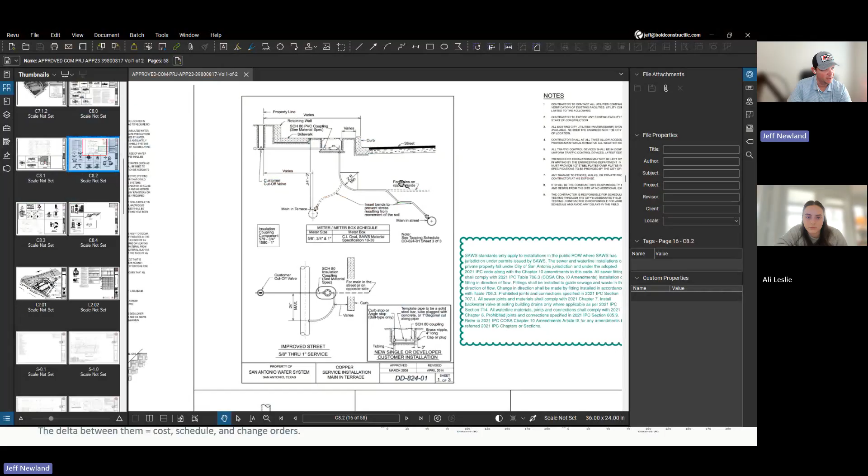And you can always tell that because it's usually on their own title block. This is called a title block. And the civil just pulls this from their website, in this case from the SAWS database for their drawings.

But you'll always have some type of detail that tells you, for instance, this is how we're going to set our manholes. And this is where the diameter of the lid, the inside diameter, kind of where it's piped, all that kind of good stuff. And you'll read these just like a normal set of plans.

So like where you would have a cut view or something like that on a set of architecturals, these will have, so this is 4.0, and this is actually his site paving plan is 4.0. So there, we've already busted the standard. Let me see, here's 4.1. What I'm looking for is the utility page. There we go. So here's our utilities, everything that was coming in.

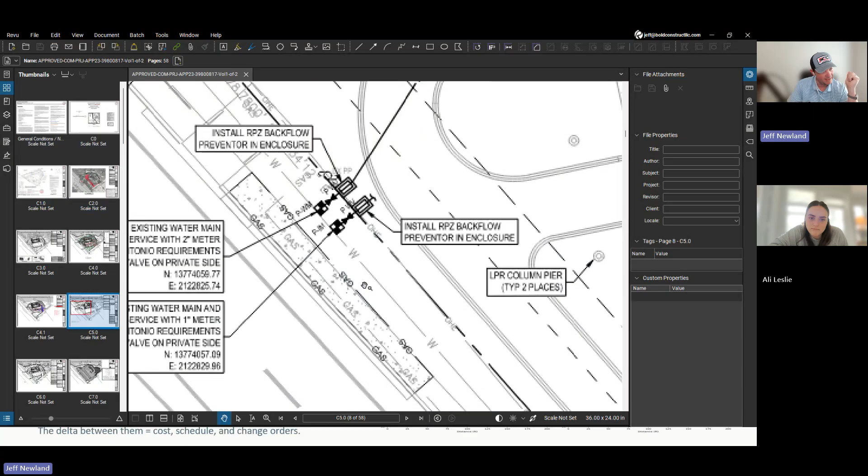So this information that I was talking about before that's not highlighted, it's not in dark black, came from the city. So they have water, gas, overhead electric, everything's running out here in this easement. And then that's where Hamilton tied on to it.

So that's where he elected to, he probably had a conversation with the city, and the city said, look, you can tie on as long as it's anywhere out here. It doesn't really matter. So then he ties on to it wherever he needs to in order for it to be convenient for us on site.

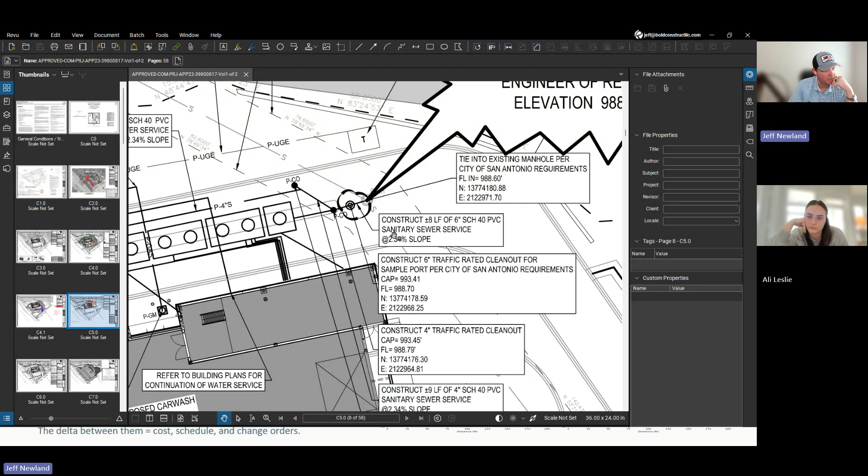But you can see here this shows a manhole that we're putting in. Also points to, let's see, construct plus or minus 8 linear feet of 6-inch Schedule 40 PVC pipe, sanitary sewer service, and it gives you the slope that he wants on the pipe. And you can see that's going from the new manhole that we're setting to the existing.

Just because that manhole, the new manhole is black and the old one is gray. Typically the grayed out one is the old, typically on plans. Typically, yes. And you can always kind of confirm that with, let's hop over to the demo page.

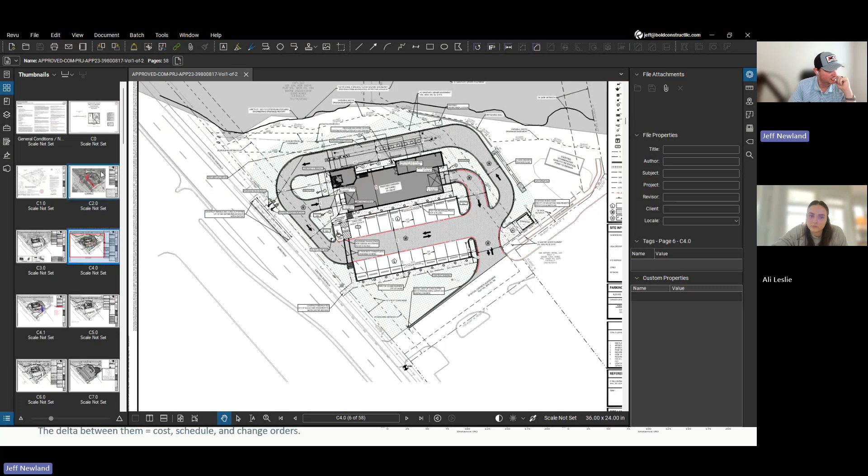Okay, so this is the existing survey. This is when the car wash was there, the old one. Let's look at, so he doesn't really have, this is probably what it was, I'm guessing. So usually there's an existing conditions, and he probably used the survey as that, but the survey doesn't show us, because it could be confusing, like, how the hell do I know that manhole's even there? So the only way to decide that is, for instance, this page here is his demo plan that he had made.

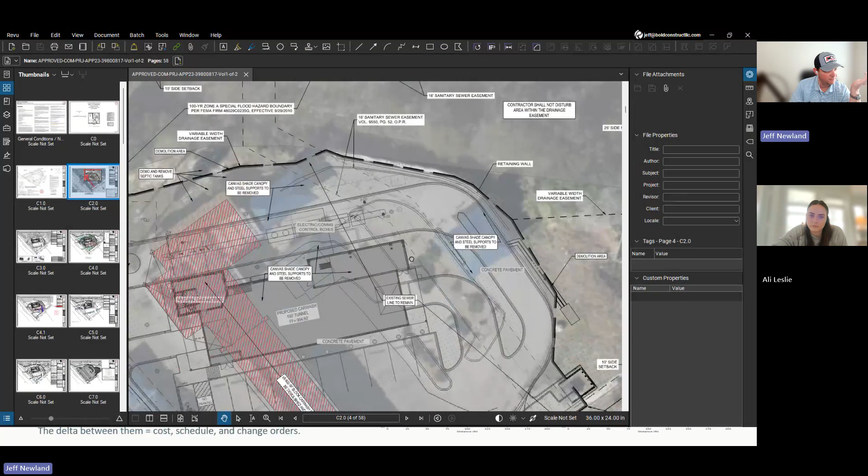And the thing that makes this confusing is that the demo plan, he's got this overlaid for some reason with the car wash on it, the new one. So it makes it super confusing. Let me pull up a different one.

Grab my charger. Sure. Let's see if it's on here.

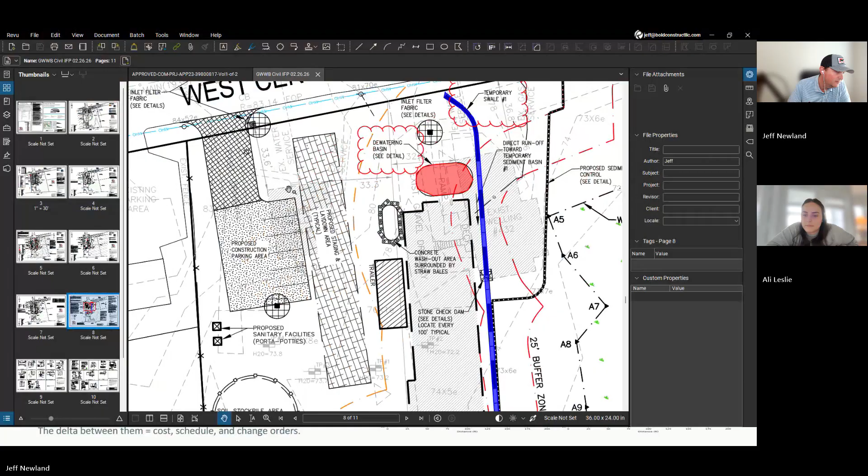So this is a good example of an existing conditions page. This is between the demo, and sometimes they do combine the two pages. I'm looking here to see if he actually gave us a demo plan. I don't think so. Yeah, so this guy, well, he sort of did. Okay, so let's look at this.

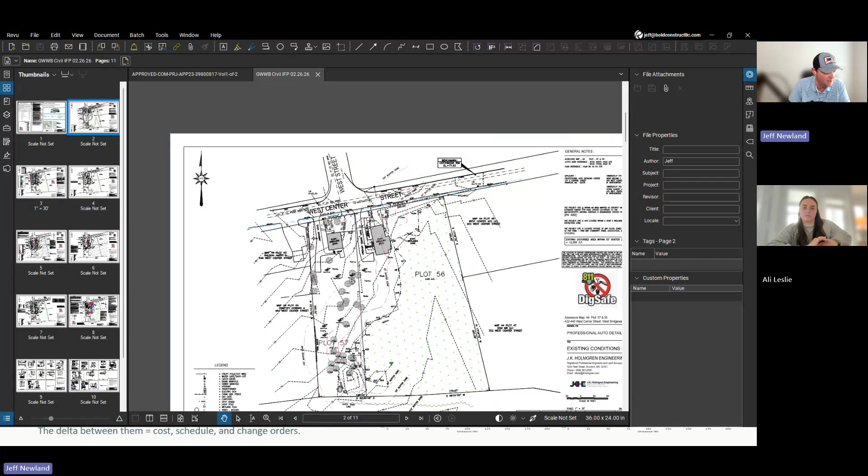And as you'll see, the civil plans, in my opinion, are the ones that you really have to pay attention to and dig through, because you have to do the most research with these as far as being able to understand them, because they're so different. So here's the existing conditions page. There were two houses on the lot. You can see how these lots are huge.

But immediately I can already see that this is like marshland here, and there's an existing wetlands. So if this were the first time I was looking at these drawings, this is a pretty big deal, so this would be something covered in your handoff meeting, and it kind of was what we talked about last week. Essentially, here it is, and then it goes all the way to the back of the property here, we'll call it there. So of this huge lot, this is the only part that's buildable, right there.

We can't even get on any of this. We can't disturb it. In fact, in this case, there's some type of, not endangered, but some type of species that lives there. So they are going to be hyper sensitive to us building here, them being the city. I'm sure the animals will too.

Anyway, so kind of combining these two, like this existing manhole right here, it does say EMH, which means existing manhole. And it shows where he thinks the sewer line was. So play this through a little bit and think about closeout documents. When we want to get as-built documents from plumbers and stuff, this is why. He's going off of whatever was last turned into the city for this site. And this manhole may not even be there.

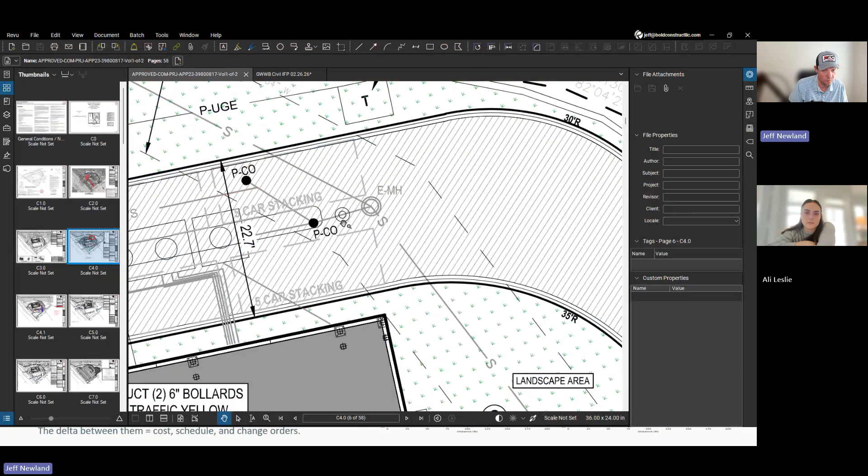He can look on Google Earth, he can try to look it up, see if it's there. So when we're tying into existing manholes, catch basins, whatever, it's very important for us to actually determine if they're really there, number one, and number two, if they're in the right location. Obviously it causes a big problem if this manhole's up here instead of right where he thinks it is. And typically you don't find that out until you have people on site, because 9 times out of 10, the civil engineers aren't going to go out and confirm.

Like you said, they're just going to go based off of what was last turned into the city. Exactly. Yeah, I would say almost 10 out of 10, especially if they're out of town. They'll never even see the site other than from Google.

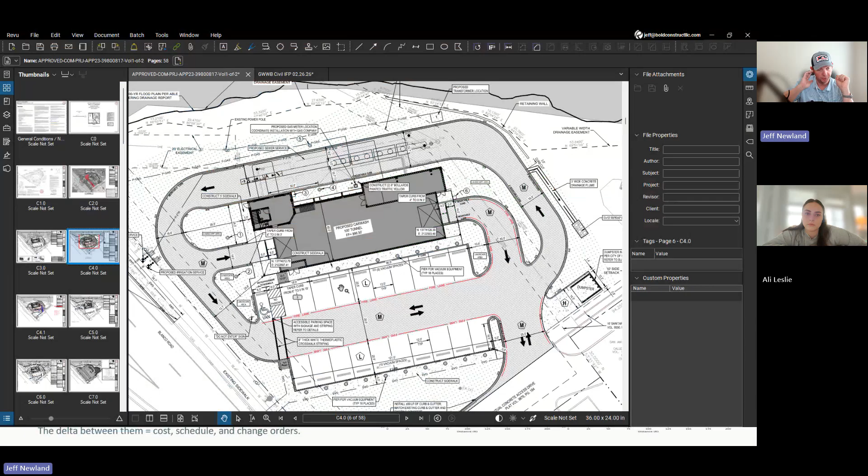So anyway, that kind of shows you a little bit on what, and this is where doing RFIs really helps. So if there's questions on, hey, what did you mean for this? What did you mean for that? It's where the RFIs come in and getting those questions answered. And hopefully we will have done some of that in the pre-bid so that you would already have the answers for it whenever we go into the handoff meeting.

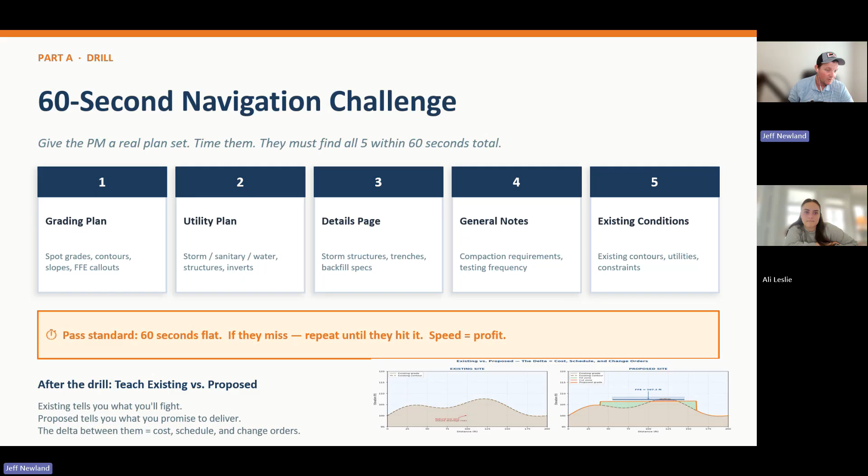And of course, general notes, we've talked about compaction requirements, testing frequency. That's going to be in your geotech report. So all of these projects, whenever we're doing ground up, we have to have a geotech. And you know what a geotech is. So when they go out and they bore, they pull samples and they kind of tell us what the existing conditions are. And then that's how they actually design the structural foundation for the building, and give options there. And then, of course, existing conditions with contours and utilities.

Let's look at this real quick. Okay, so this is a huge exaggeration. It's way exaggerated, because you won't ever see something like this on any civil set. This is just to kind of explain to you what you're going to be looking at, or what you have to envision in your mind.

So we start with the existing site, and it's going to have bumps and elevation changes, and it's going to completely depend. Like Salina, we had to cut a ton of dirt out. Other sites, we had to bring a ton of dirt in to build it up. But this is the main function of the civil engineer, to determine, when we build this building, especially if it's going on a piece of dirt that's never had a building before, where's all the water going? That's their main function.

Looking at this, the green area here is what would be called a fill. So let's start from the top. This would be your finished floor elevation, whatever he determines it is in the building. Let's say in this case it's 107.2. Then he'll go from that building out to the site and say, okay, these existing conditions where we've got all these rolling hills, we're going to need some fill right here to bring the site up. And then we're going to cut off this little top of the hill. So that would be a cut.

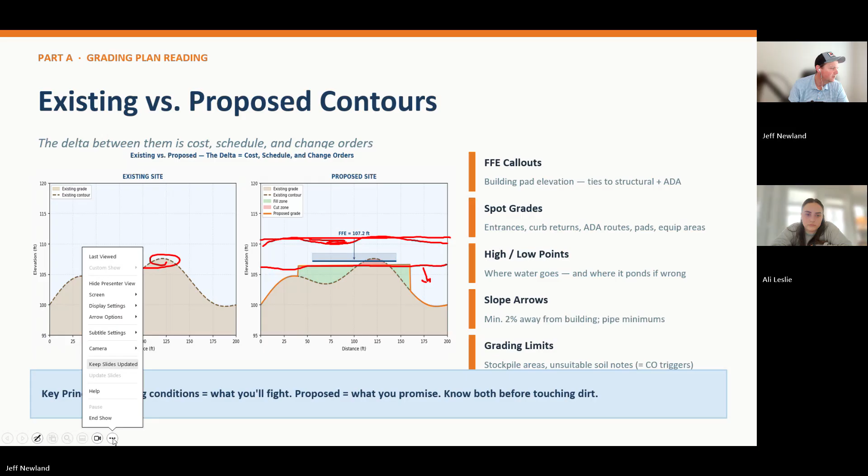Okay, so let's look at the next slide. Choo, choo, choo. There we go. Wrong way.

Let me show you, see if there's a cut view of a pipe. Okay, so I'm not exactly sure what, so this is basically just a trench detail, but the invert on a pipe is going to be right here. That's where your invert is. Basically, it's the bottom of the pipe, because that's where the water is going to flow.

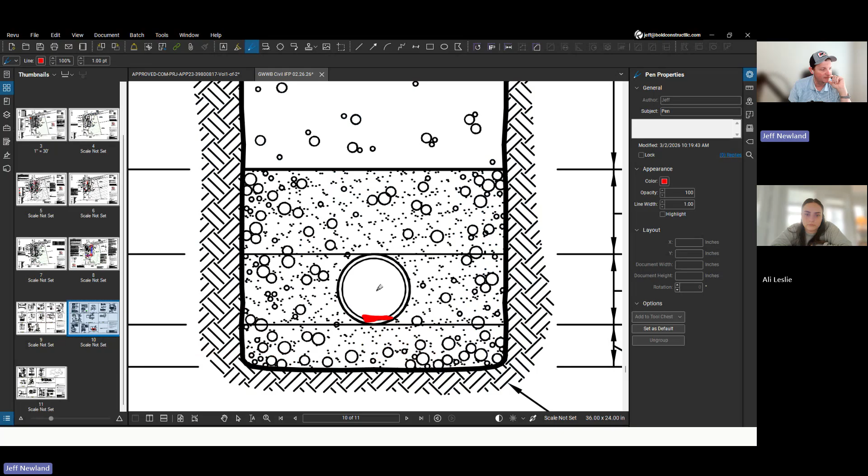Your flow line is usually the center of the pipe, but we don't necessarily reference flow lines, because that could vary depending on the size of the pipe, right? So if it's a 12-inch diameter, a 6-inch diameter, a 2-inch diameter, that center stays the same, but the invert changes because the pipe gets bigger.

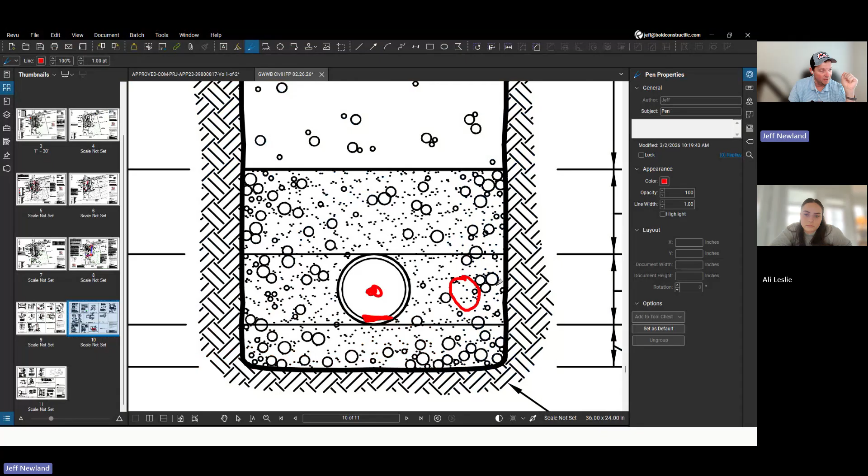So meaning that if this were a 12-inch, you can kind of see the centers would all stay the same, but your inverts change. If it were an even bigger pipe, your invert changes on every one. Okay.

And then to kind of look at this in plan view, let's see if they give us an invert. They should. Okay. Not all of your civil drawings are going to be this crowded and confusing to read, because you've got grades, you've got new grades that are here. So TC and BC, that should be top of curb and maybe bottom of curb.

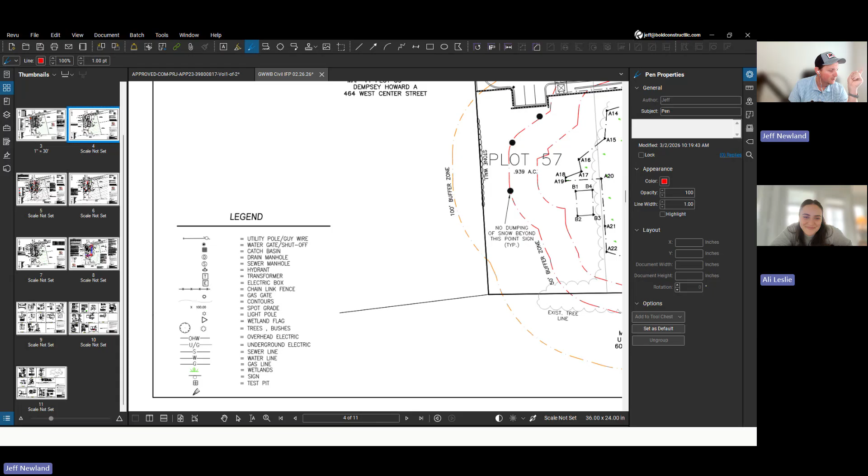But always look for the legend, and it may not be on this page. Of course, it's not, because that would be too easy. Here we go. There's our legend. I would refer back to that a lot of the time. Yes, exactly. And I don't see TC and BC on here.

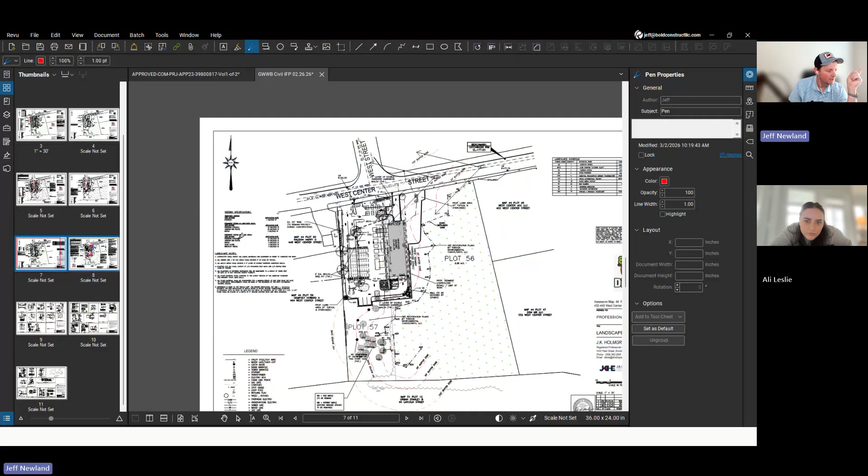Nope. That's the landscape plan. It's not on here either. Yeah, this civil engineer just did not do a very good job, in my opinion.

And is this a project that's already done? No, this is Green Wave. This is in West Bridgewater. Okay.

So let's look at here. So if this is top of curb, bottom of curb, then our curb, 82.02 minus 81.77, is basically a quarter of a foot. So a quarter of a foot is going to be 3 inches. So there's a 3-inch difference in these elevations.

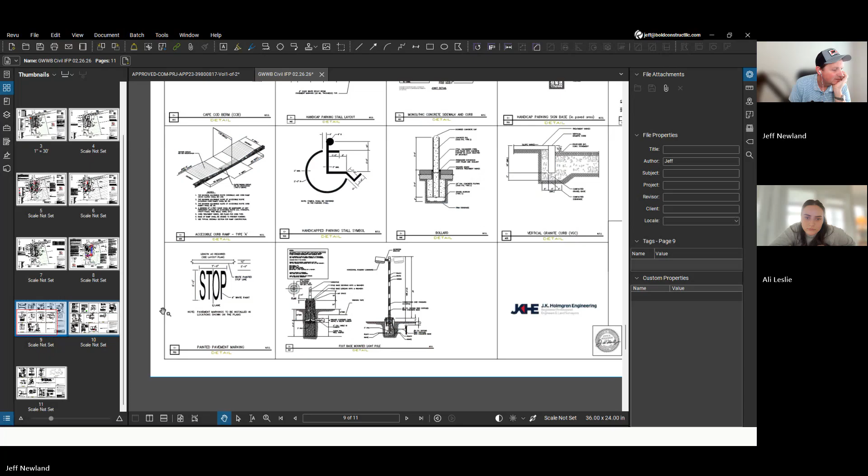I would probably have to ask a question on this, but the next thing I would do is go through and look for a curb detail. Dumpster pad, utility trench. There's a curb detail. Okay, well, sort of. All right, so our 3 inches is right here. So that elevation that it's giving you is going to be from here to here.

Well, that's not exactly the bottom of the curb, right? To me, in my world, the bottom of the curb would be right here, because that's the grade that I really want, because these are precast, so they're not pouring this into place. And you can see we're prepping our sub base, then we're putting down a base coat.

This is a base coat or a binder coat, but basically it's a base coat of asphalt first. And then we're going to come in and just set these curbs in place. And then we're going to pour the top coat right here on the asphalt. Okay. So you can see the curb.

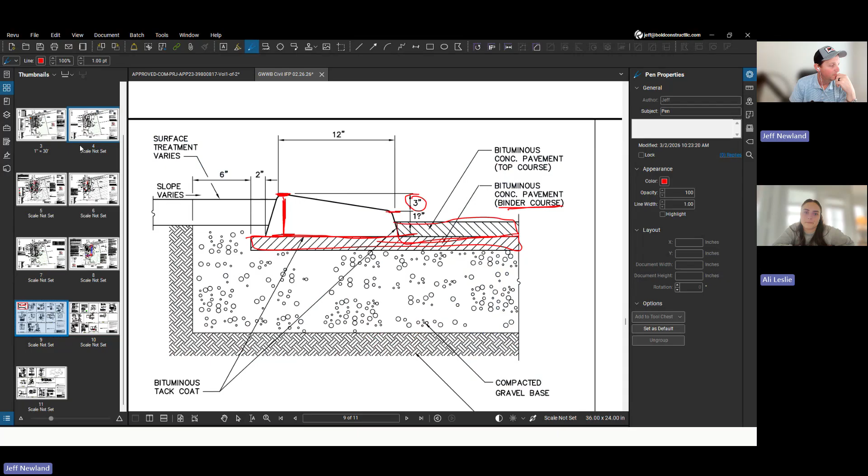So our curb is actually from here to here. The tallest point of our curb is right here. So it's very critical. So that 3 inches that we've got doesn't tell us anything. And that's not something that I expect you to actually catch, because it's an atypical situation.

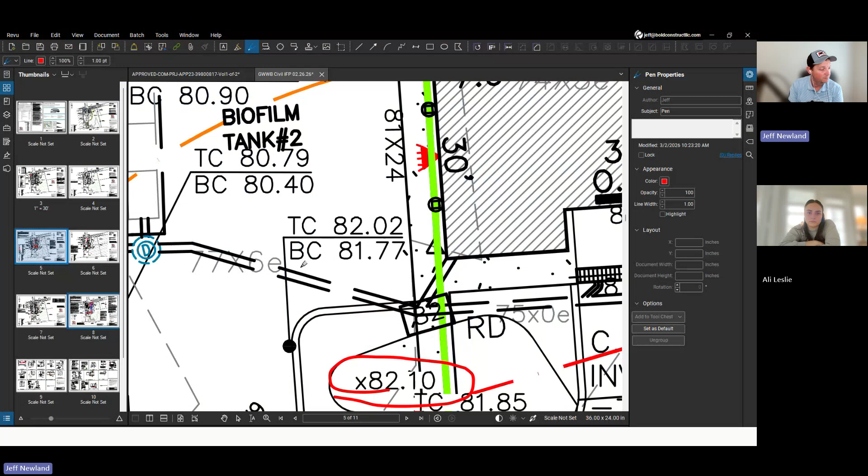Bottom of curb being 0.25 lower means nothing to us, because that doesn't tell me where I need to actually be graded. It should give me top of base coat. And maybe that's what this is. Maybe this is base coat and top coat instead of, I'm thinking, top of curb, bottom of curb. It could be bottom coat and top coat. So again, if we had a legend, that would explain it to us.

But we don't have that. Is that something you would go back and ask? Yeah, so we'll ask that. And the way we'll word that is, we won't necessarily call it out and say, hey, there's no freaking legend on the page, so what is TC and BC? We'll say, to clarify, does TC mean top coat and BC mean bottom coat elevations, or are those top of curb, bottom of curb? And then we'll let them answer it.

Anyway, let's go back. I'm sorry, I got us off track. No, that's okay. I was looking for the invert to kind of show us what an invert would look like on the page. Okay, here's one. This is one that he has marked up. Again, it's difficult. I know that he's pointing to this trench drain. So the trench drain he's talking about is right here. This tells me that the rim of the trench drain is 81.17.

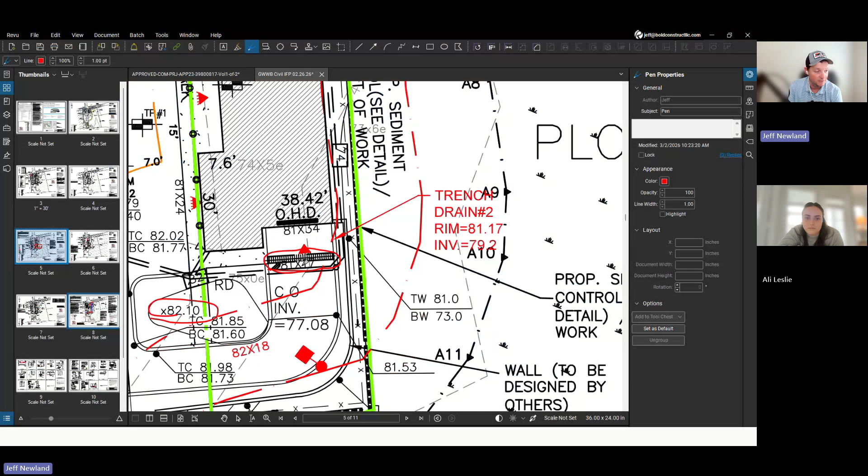So this trench drain looks like this. They would dig out, basically, and then you've got your paving that comes up to it like that. It's got a grate on top of the trench drain, and then there's going to be a pipe, depending on the design, either here at the bottom or over on the side, but either way. So when he says the rim is 81.17, he's talking about this point right here being the rim at 81.17.

And then he says the invert is 79.2. So the invert would be right here, and that would be 79.2. So roughly that's a little bit less than 2 full feet, because if we add 2 feet to this, we get to 81.2, and this is 81.17. We're not building watches here. If you're within 3 hundredths, we're going to call it 2 feet.

Now this is important, because when you go to look at your submittal drawings for the trench drain, you need to make sure that from the grate to the invert is 2 feet. And if not, then whatever they submit may work. We just need to be sure that we dig into it and make sure that it's going to work. So that's one small example, and you would do the very same thing with,

let me look at, okay, this one's a landscape page. We're going to have to look at it here. It's just so confusing, he's got so much stuff on here. I tell you what, let's look at San Antonio. There's not going to be as much, at least a little less.

So, again, if we go here, Jeff gives you the actual flow line, and these are coordinates. You don't need to worry about the coordinates. Don't worry about that.

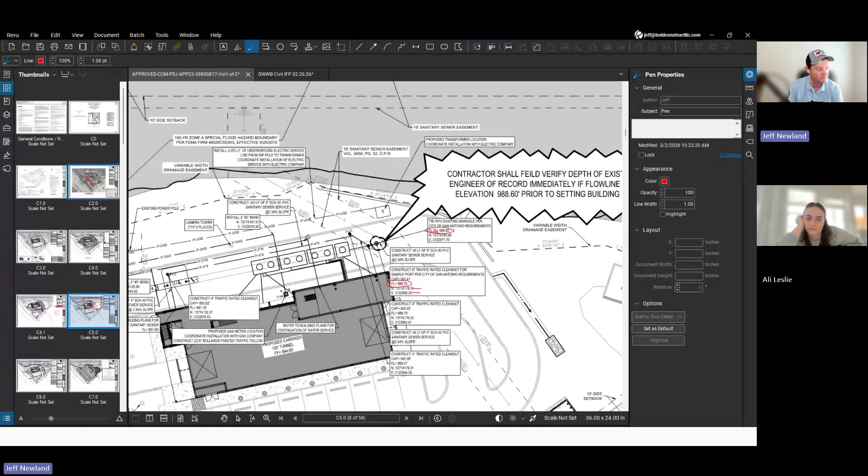And really for your purposes, flow line, actually he calls it flow line invert, which is no different than the flow line, which is what we've already talked about, right? But this would be stuff you're not going to spend a ton of time on. This is kind of where the difference is between a PM and a superintendent, because he should be reviewing this stuff. I'm teaching you this not because you'll review it immediately, but so when the superintendent comes to you and says, "Hey, our flow line's not right," you'll at least know what he's talking about. I guess is my point, right?

Yes, that was a common question I had on each of the videos, because I wrote down all my questions, and on each one I put, give me an example of how I would use this. On the grading plan, not too much. Calculating invert levels was not bad, or the proof roll, but on the grading one I was like, okay, I would not be responsible for finding these numbers, but this is teaching me how to do it if I needed to, and also in communication I would know what someone was talking about. Exactly. That makes sense. 100%. Because actually finding the grades, you've got to be in the field. It's real world application in order for it to click and make sense, because it can be very confusing just looking at it on paper or watching videos.

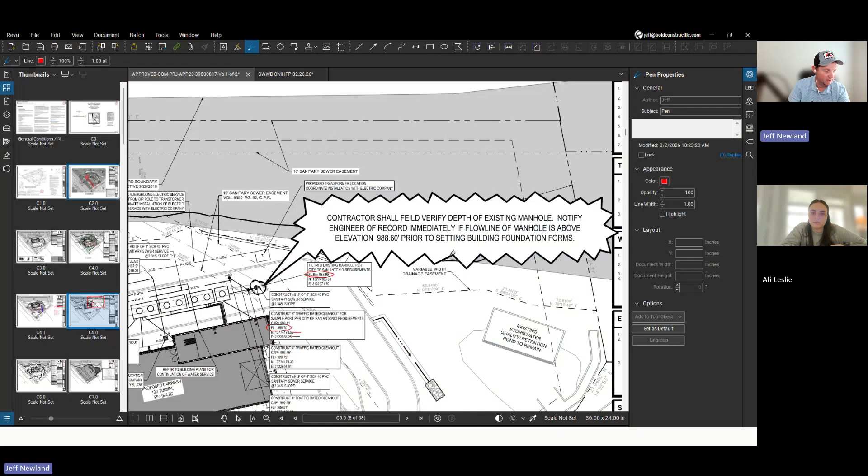Yeah, I was on my walk this morning and I was looking around, because in the video he says the best way to learn is looking at the world around you. And I was like, that's a wetland, that's this, that's that, which I've done for the last 4 years, ever since doing anything construction. The videos can help point things out, but putting your phone down and actually looking at what's around you is always more helpful. Exactly. That's exactly right.

So that talks about invert, rim, and of course slope, that's your rise over run. So if we've got 100 feet that we're running and we want that to drop 2%, you would take 100 feet times 2%, so 100 times 0.02, which tells you it's going to drop 2 feet over that 100 feet. Most guys and girls in the field think about that in inches. So if it's dropping 2 feet over 100, let me do this real quick: 24 inches divided by 100 feet gives you basically a 1/4 inch per foot. That's how they think about it.

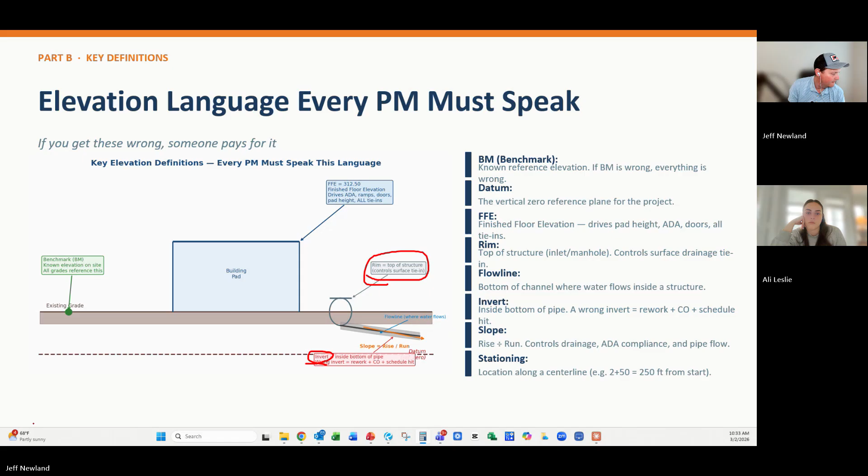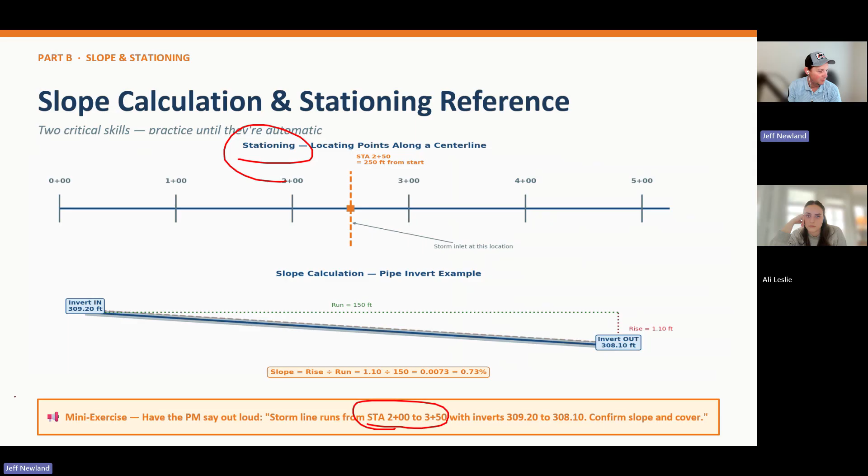Let's see here. All right, so that's talking more about stationing. Don't worry about stationing. Nobody talks like this other than surveyors, where 2 plus 50 is actually 250 feet. They just give you elevations, and then they'll give you slope. You may see this from time to time, but it doesn't mean anything to anybody other than the surveyors. Instead of saying station 2 plus 00 to 3 plus 50, we just say it's so many feet. All right. So, like I said, this.

So this is something that a superintendent may tell you. He may look at something and say, hey, we shot some existing grades, and the rim elevation right here is actually 310 instead of 311. So now our flow line is not enough, right? Because we decreased it by a foot. So this either needs to be deeper, maybe it goes to 307 or something like that. But he'll tell you, hey, we need to do an RFI to figure it out, basically.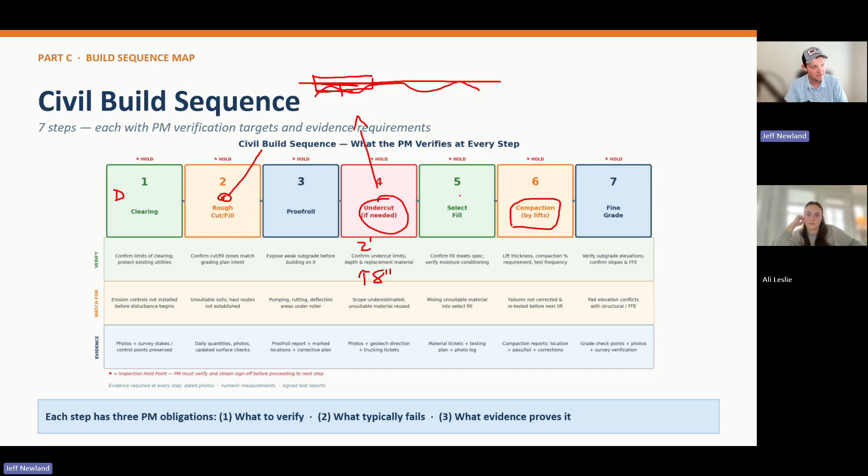And once that's done, we get blessings on it. Then we can start our select fill with our building pad: now we've got 12 inches of building pad and rock, or whatever else they've told you to put in there, to get to this point where we're going to have a final compaction test on the actual pad. And that would be before we dig for the foundation or set forms for the foundation.

Okay, but no testing would be needed until after, like you would do your proof roll first. You wouldn't do any testing beforehand? Nope, because it doesn't really do you any good to do the testing first, because nothing's been compacted. Part of the proof roll is you're actually doing a little compaction test. So yes, that would be correct. And then once you get to this point, you have your handoff meeting with your concrete subcontractor, and you say, here's the pad, take a look at it and make sure it meets your standards.

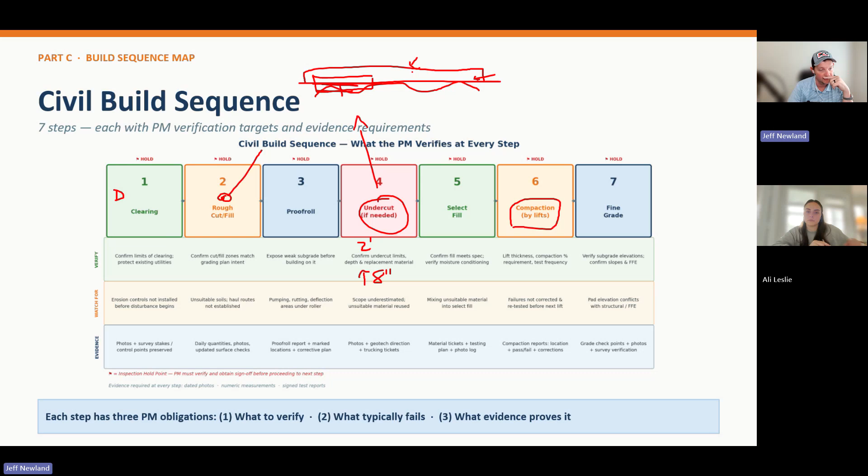So, let's see, all right. This goes more in depth into stuff we've already talked about: the clearing, the rough grade, the proof roll, and the undercut. And then the select fill, after the site's good and we know all the existing material is great. Then we're looking at the paving. They'll go around and shoot grades again once they get that done. Let me see if we can.

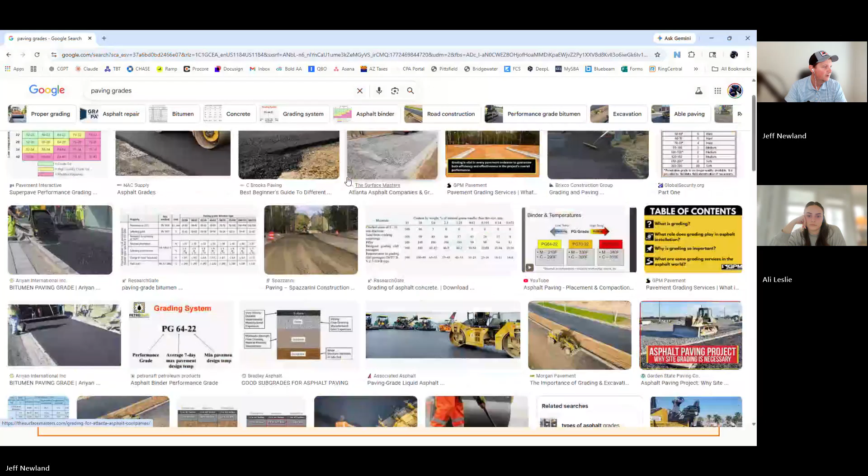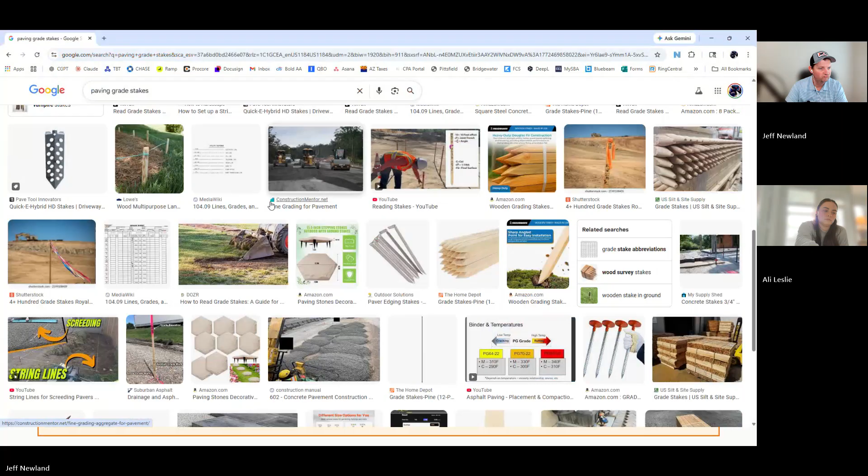Well, I don't really see a good picture, but, well, so for instance, they would have these grade stakes set all over the site. Yes. Okay. And then that would tell you, it gives you the existing elevation. And in this particular case, the C-62, that's telling them that you have a cut. So that tells the grader, when he's going through and looking at these and he's pushing dirt around the site, that kind of tells him where he needs to grade to, kind of gives him a good idea.

Okay. And then, so obviously, if instead of a cut you needed to fill that, then it would be an F dash, however far it needs to come up in order to get to that elevation. So they've done that all over the site, and then that's where they'll actually set your building corners as well. It is very important that you don't want to set your building corners until you have the site rough graded and the proof roll's been done.

You're not going to have a lot of disturbance, right? Okay. That's how we end up setting the building corners 4 and 5 times, is because we set them too early and then we destroy them in trying to get the rest of the site right. So, compaction by lifts, that's where you have the building pad. Let me see if there's a good one.

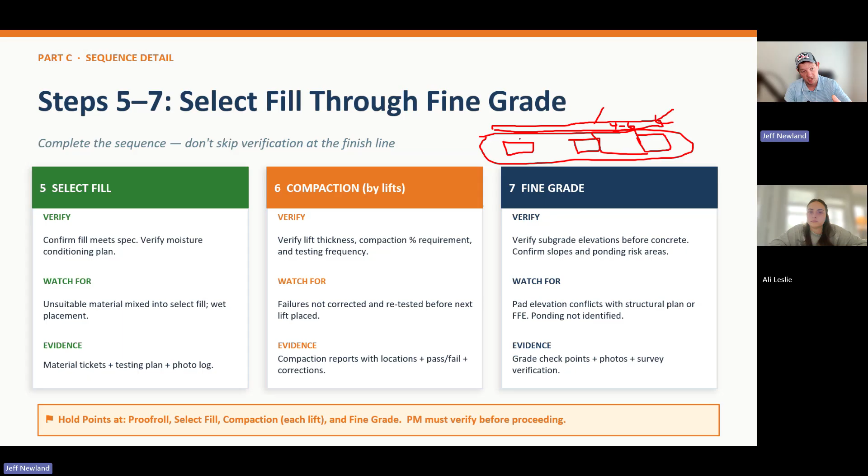But you won't have a fine grade on your actual building foundation until all your utilities are in, and they cover it up, and then they'll come in and grade it, just a fine grade with some sand to get it where it needs to be, and then they'll form up to pour their actual slab. Okay.

Let's see. Yeah, so this is just pass and fail on a proof roll. So obviously no visible rutting, no deflection, no water is a big one. If you see that it's squishy, a lot of times what'll happen too is if you rough grade a site and then before you proof roll it, it rains on you. Well, it's very important that we let that dry out, or else it's going to give us a false reading on the proof roll, right? You're going to rut it up. It's muddy. It's obvious. So the site does need to be dry.

Let me see. Deflection. Yeah. So proof rolls are not something you're going to spend a ton of time on. It's something that you only do once a project, but it is very important. And oftentimes it's just enough to ask the question. So here's where it would apply. If you're looking at a 3 week look ahead for a superintendent, and you see us going from demo earthwork all the way to building pad,

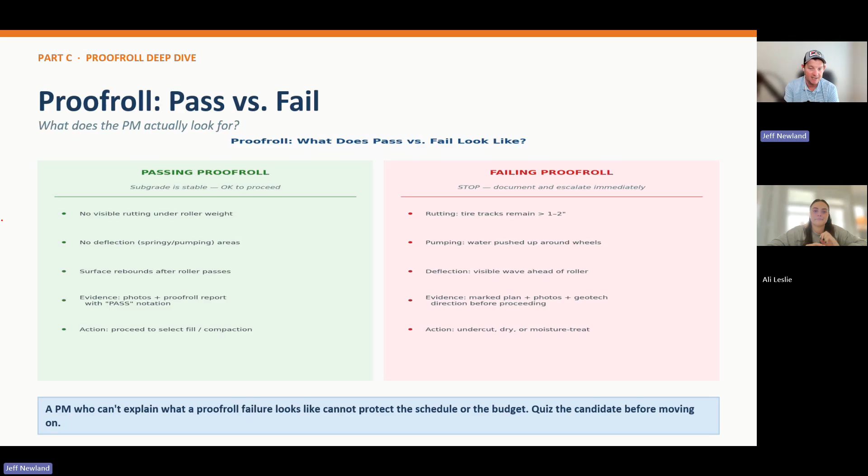then you're like, when are we doing our proof roll? Just so I understand, when do you have the proof roll scheduled? Well, we kind of need to see that on the 3 week look ahead. We need to see the steps that we need to take. So that's kind of where it would apply from a project manager standpoint. Okay.

Let's see. Okay, this is a pretty important slide because this is going to trigger your civil change orders. And so it's super important when we're doing the dirt work ourselves, which we're going to do more and more of. But also these are things that you can expect to get a change order from a subcontractor. So the first two are the most common. So unsuitable soil. Typically the geotechs are pretty vague, and we may start digging out, removing some existing utilities or something, and find out that there's a lot of organic material.

Maybe somebody went and dumped some asphalt underneath that you couldn't see until you get to it. Okay, all that has to come out. Any organic material has to come out, especially if it's in the building pad.

Rock is another big one, especially up north and in central and south Texas. Tons of rock everywhere. I bet we probably spent $20,000 on rock excavation in San Antonio. We've got no way to know that it's there. And there's two reasons behind that. Your geotech may say that there's rock there, but you never know. One boring may show it at 7 feet, one boring may show it at 2 feet, one boring may show it at 10 feet.

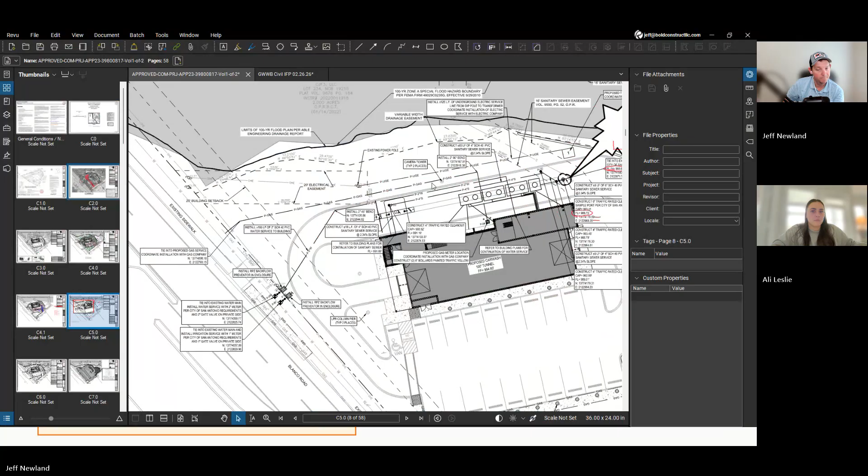Now, well, in the past, so I could be thinking of something completely different, but maybe it was in the meeting last week. I think maybe you had said there's a benchmark on the tree. One of them said that there was a nail in the tree. Yes. So pretty much it's a point, whether it's the stakes or whether it's something that's already been there, like trees. You can benchmark off of that, and that just keeps everything in place.

Because I know from the past of all of the projects, I remember hearing the benchmark was removed or it got moved. So then that screws it up. But you want to keep your benchmark in the same spot so you know exactly where your entire building pad is. Exactly. And then once that building pad is poured, then that becomes your benchmark. Hopefully you're done with all your utilities by the time you get to that point.

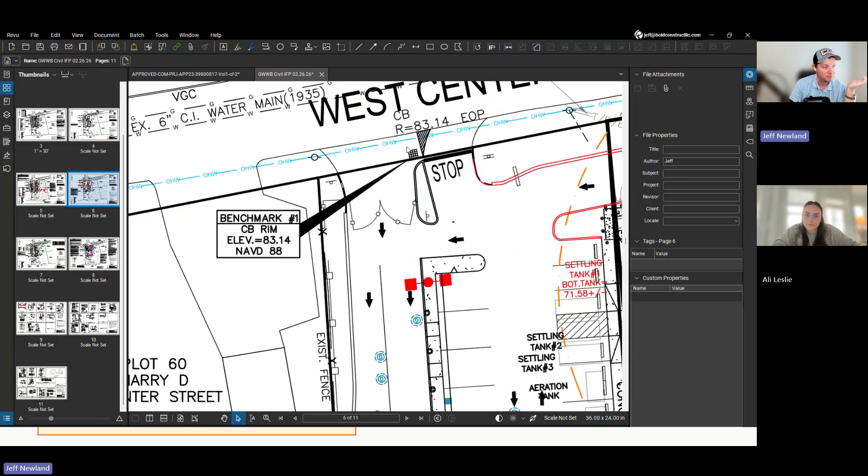So yeah, this is exactly what we were talking about. So this catch basin here, this is actually outside the curb. No, it's not. It's actually inside the curb, but just in the easement. It gives you a rim elevation of 83.14 as benchmark number 1. This one down here is benchmark number 2. It's a nail in a tree at 82. Okay. That's the one we're not sure if it's still there or not.

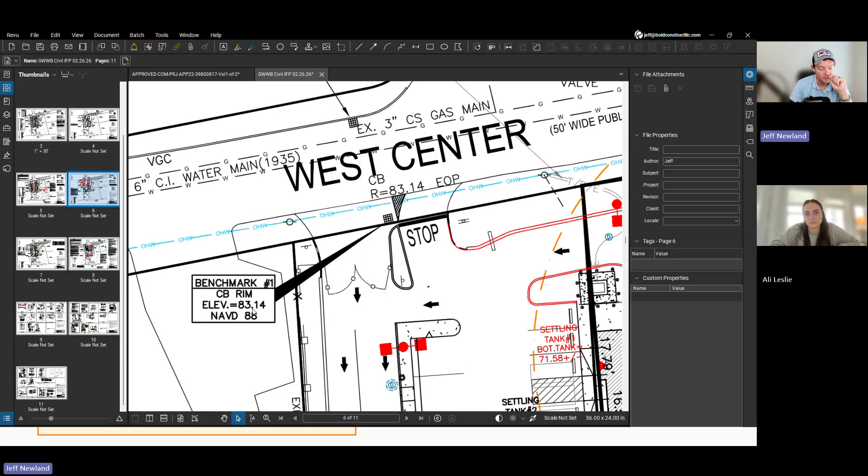This one's probably still here, but what we need to do is verify the elevation. So we need to verify that 83.14 is actually accurate. And the surveyor will do that. He'll verify that that's good. And then the superintendent could decide, do we want to keep that benchmark there? You always want your benchmark, if at all possible, in one spot where it never moves. Yeah. Because if it moves, then you've got to transpose the location, and it could create human error.

Right. So that's why typically we will always do it. Maybe there's an existing tree that we know is not moving. It's completely off the property. The surveyor will go over there, put a nail in there and say, that's your finished floor elevation right there. For instance, our finished floor elevation is 81.34 for the building. Everything else is driven off of that. It's always verified, but that's your starting point.

In big sites, they'll have multiple control points. Yes. So if it's a huge site, several acres, then they have multiple control points because you'll have different guys working in different areas, and when they set their instruments up, you don't want them interfering with each other, which can happen. So just remember the benchmark and control point are the same thing. They're interchangeable terms, and it's your starting point. It's what you always start with on the job.

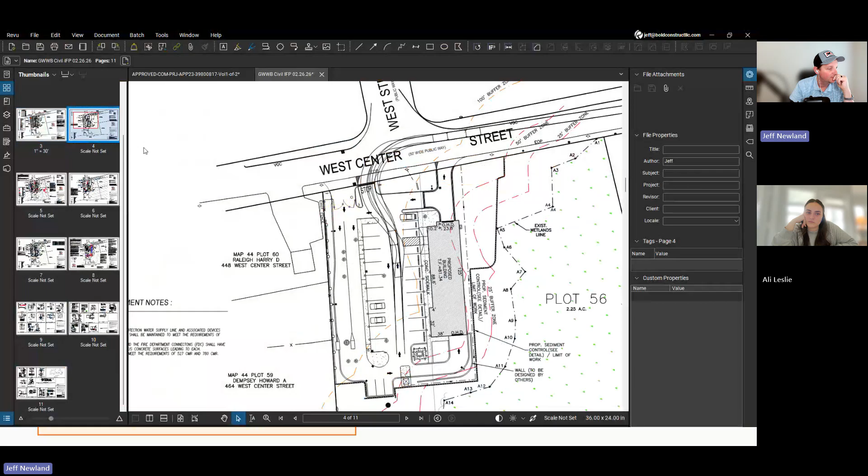Let's see, identify one critical grade spot and explain what it controls. Now let's look at, I don't know that either one of these examples are very good. I would like to show you. It's not real good.

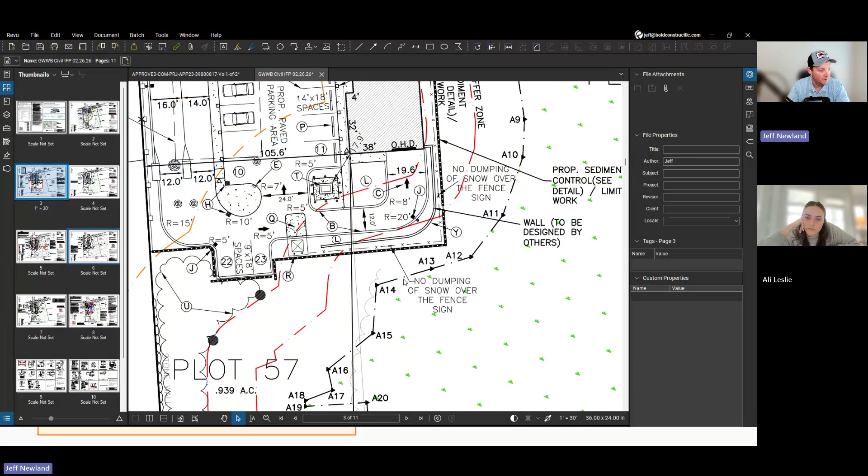It's got to be on one of these. 1 second. Let's look at, okay, this is, again, tough to read because it's got a lot of shit on it. But what he's got drawn here, it's all buffers. Okay, this is better. Well, I don't know if it's better or not, but it's something.

Okay, so this is showing you something that you need to probably just practice. And that's the only way you're going to get it is if you practice. Like I can look at this and tell you which way this thing's sloping. So I can look at it and say, okay, there's 74, there's 76, there's 78, and there's 80. So I know from this point, we're sloping at least this direction.

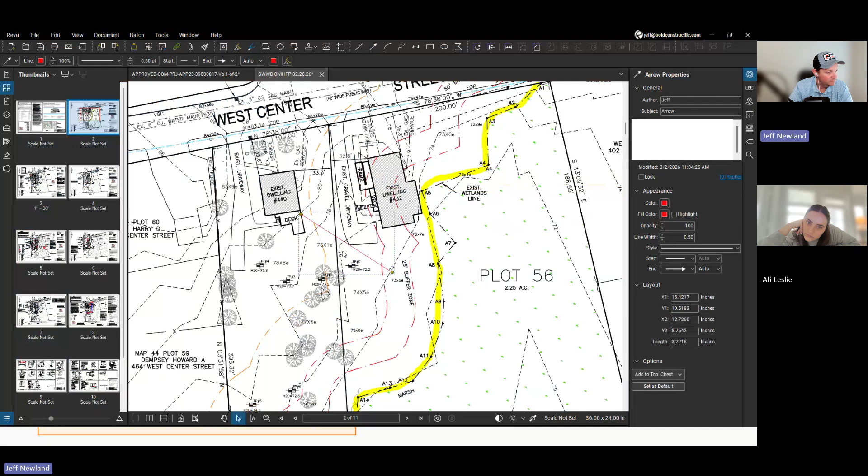So now we got to determine which way. Is all the water coming to the back or is it going to the street? Well, you would think that it would go to the street, but let's look at the street elevation. This is all existing, by the way. This is how the existing site was. Okay. So we're 80 here.

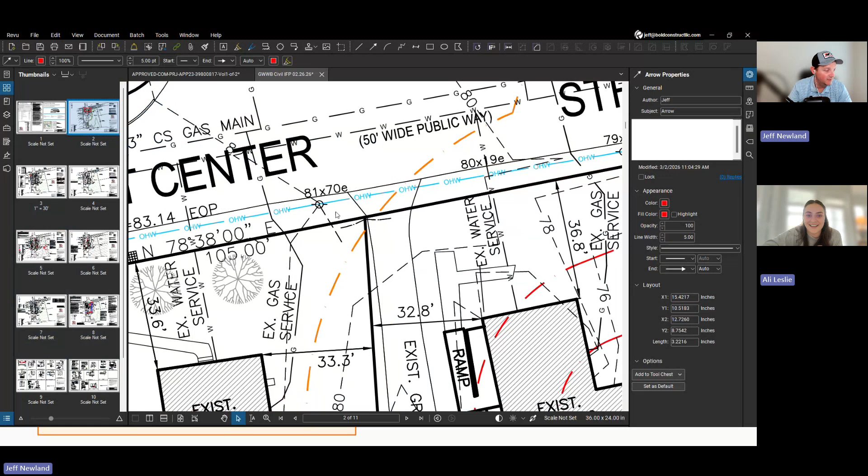We're 80. So this is a different way to write 81.70. Yeah, I would have looked at that and thought that was a math problem, to be honest with you. I know. No, it's 81.70. Just like this is 83.14, that's 81.70. This is 80.19. This is 79, and so on.

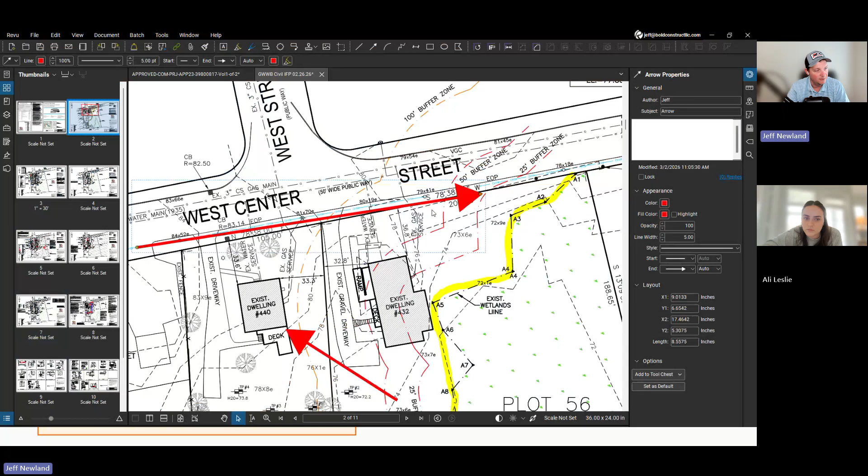So I can look out here and tell you that this is actually sloping. I know that my street elevation is all going this direction because I'm starting out here at 84. And don't ask me why they write it that way. I have no clue. Yeah, strange. I'm sure there's some explanation somebody with an engineering degree has, but I can tell that I'm high here, I'm low down here. So I know that this thing is sloping this direction.

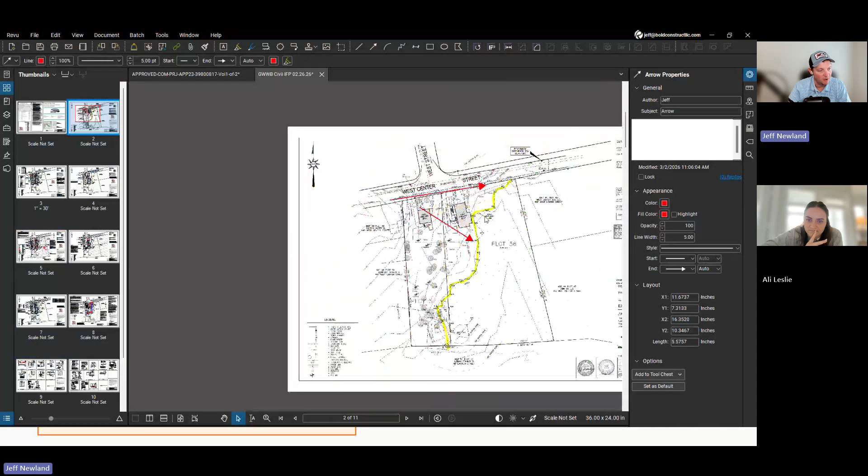All right. So basically, I put which way it's sloping upwards. It's easier to think about it by which way it's sloping down. So if I had to guess, there are no elevations here. I could be wrong. Nope, there is an elevation, way out here, so 70. So basically from this point to this point out here somewhere, it's dropping 4 feet, however far that distance is. And it's dropping another 2 foot from here to here.

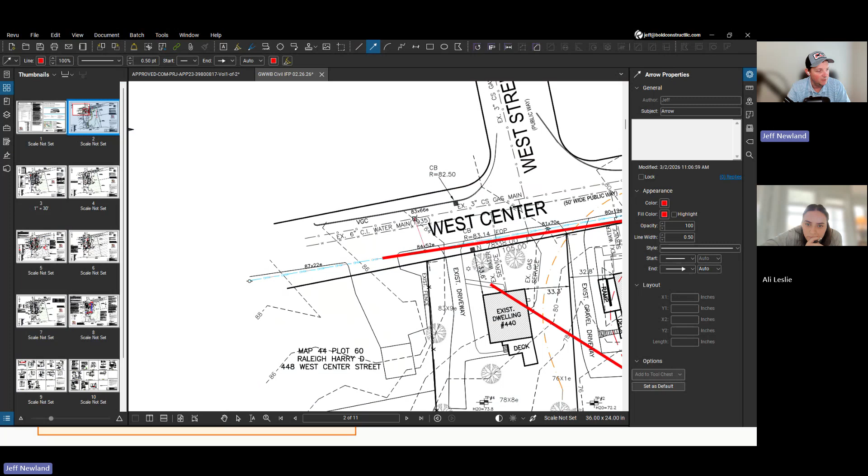So it's all sloping this direction toward the bottom of the marshland. Okay. This is sloping this way. I can look on the street and see there's a curb dimension of 83.66. Directly across from that is 84. So I know that this is sloping this way as well, which makes sense because there's a catch basin.

So if you think about it, that's probably the reason we have to contain all this water and none of it can go to the street, because none of it's going to the street right now. It's all going back here to this marshland, every bit of it.

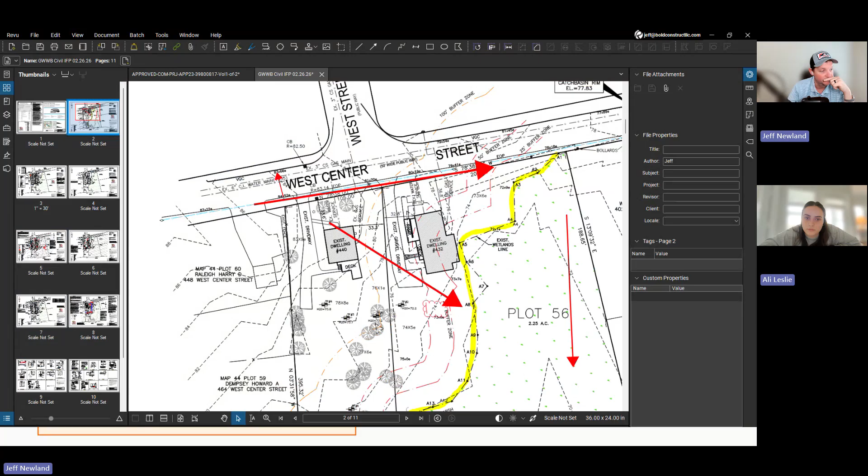Let's look at San Antonio real quick. Let's see. Should I delete that? Okay, this is a pretty good example. So you can see the closer the contour lines are together, the steeper the slope is. We know this is the creek back here. So we can see that this thing is sloping from 992 all the way to 982 in just this little bit of distance here. So that's a pretty good drop.

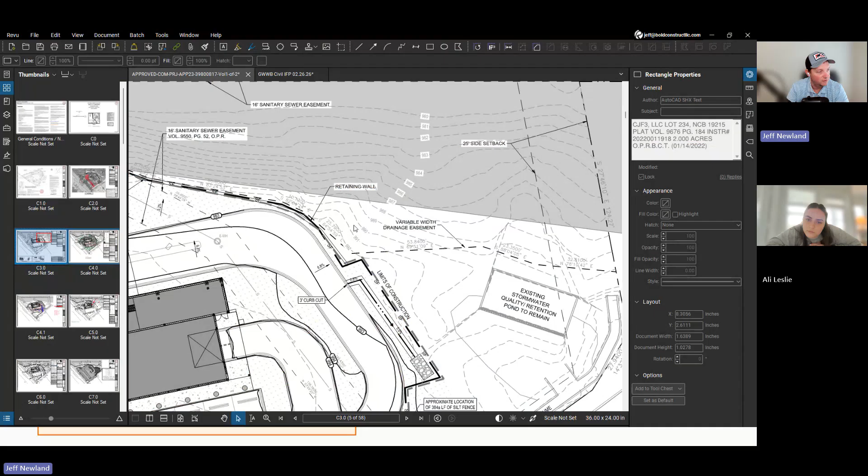It's a 10-foot drop over maybe 100 feet, which is going to be about a 10% slope, which is big. A 2% slope is going to be something like that. A 10% slope is going to be something like that, somewhere in that neighborhood. Just to give you an idea. That's how you can pay attention to the contour lines as well. You can see that it's dropping 12 feet from here to here, 980, 992.

But I always think about it in how the water falls. Where is the water falling to? I've seen water run uphill, and it's a weird thing, but it happens on roofs. Believe it or not, it happens on a roof sometimes if the roof doesn't have enough slope. It's the craziest thing. But anyway, I always think, okay, where's the water draining to?

Where is it draining to? And a lot of times you wouldn't spend just a ton of time looking at your grades. Again, the earthwork contractor is going to tell you, hey, bud, we've only got like a 1% slope back here in the back. What can we do in order to change that? And then that's maybe where we do an RFI. So that's where it might be kind of applicable.

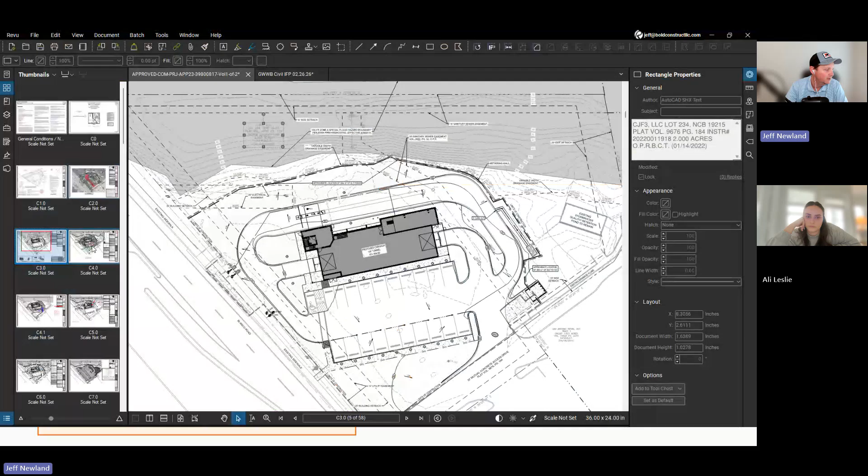Identify the drainage path. We've talked about that. Find one utility and discuss crossing. Okay. Crossings and scope gaps. Let's look at San Antonio because we did have a little bit of an issue. All right, that's our paving plan. Here we go. Something to always pay attention to is your utility crossings, right? So

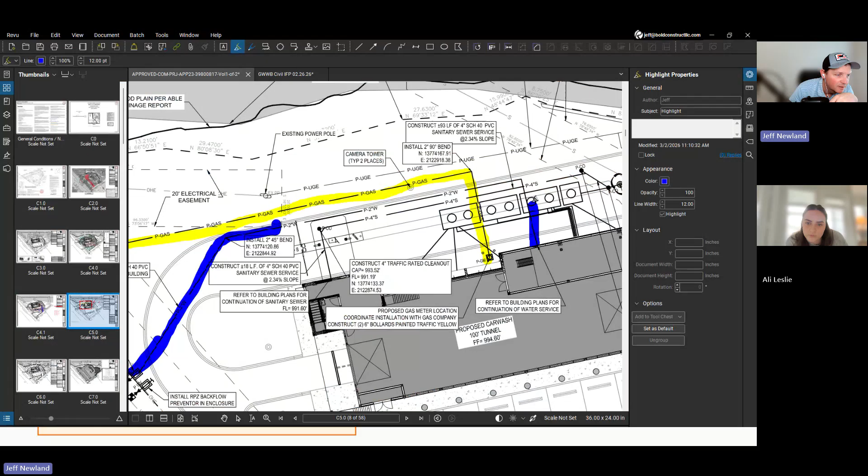What we've got here is we always like to identify our gas line, which is going to be typically yellow. Now let's identify our water, which is going to be blue. So there's our water line coming here. What does our water line do? Looks like our water line continues to there. So it's got our water line coming into the building right there. Next, let's look at our sewer. I like to use green for that.

Now, do you normally just pick any color and that's kind of the legend you go off of, or do the colors matter in this situation? No, but if you use yellow for anything, it's always a gas line. It's just a known thing. And where that comes from is when they come out to stake. When you call 811 and you want them to stake where the main is, maybe on the road, they're going to use blue stakes for water.

The gas company will come and set yellow stakes. They'll paint with yellow paint. So it does mean something. Sewer can be interchangeable. Sometimes it'll be blue, sometimes it'll be green. For our purposes, I'm going to use green so that we can see that comes down here and then it goes to there and then it goes to there and there.

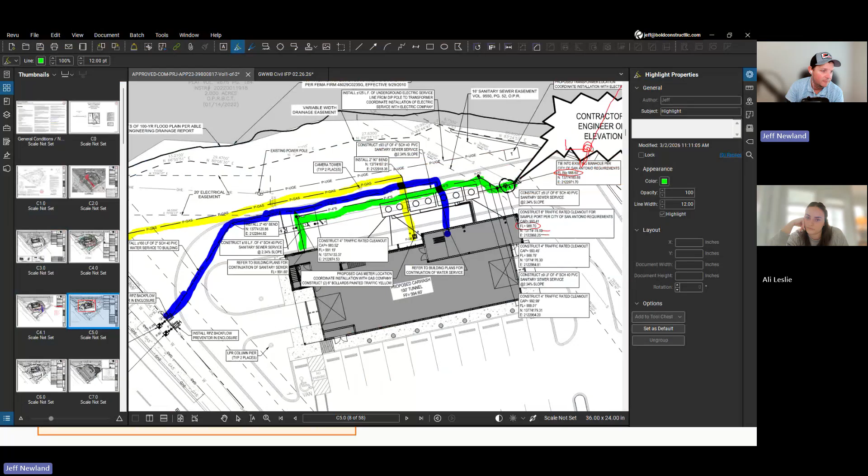Looking here, these are all lines going to the boxes. So those mean absolutely nothing. Those tie into that. Where's my sewer? So my sewer is actually existing here and ties into that existing manhole that we've already got. So this is why it's important for utility crossings. Now, first of all, he shows this coming into the building right here. That's not where that comes into the building.

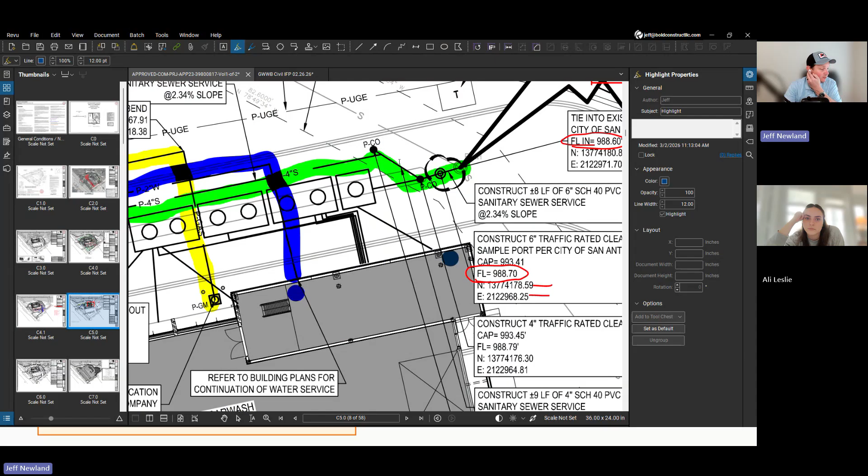If you look at our plumbing drawing, our plumbing valve and RPZ are down here. That's where they come into all of the Smitty's, right there. You can walk into any one of our buildings and they're going to be right there. So what happened was we should be getting an as-built drawing from Plumrite, because this is actually going to be here. So not a big deal. They just extended it down and ran it into this side of the building.

So that does two things. One, you don't want to run this thing near your reclaim tanks, because that becomes a pain in the butt if you ever have to get to it. So we ran it down here to keep it out of the way. The other problem is you don't ever want the gas line in your reclaim tank area. So we ran this gas line from here out there, got outside the curb, and then took it to the street like that. So we didn't necessarily run it like this.

It's a lot easier to cross these lines because these are going to be a lot deeper than trying to mess with all the piping that's here for your reclaim tanks. It just gets it completely out of the way. So that's something that you can think about. This is specific to a car wash situation, but it would apply to anything else as well.

Sorry, just out of curiosity, in the videos on Trainual, you said that the project manager typically gets about 3 days to go through the plans and study and read every single detail. Yep.

Is this something that if I get a set of plans and I'm reviewing and I see, okay, it's crossing over on these drains, and we know we're not going to do that because of prior projects, is that something that you can then go ahead and have a markup done to avoid running that into construction? Like while you're reviewing the plans as a PM and marking them up, could you already bring that to the table and say, this is an issue that I'm already seeing now, let's plan to avoid that down the road?

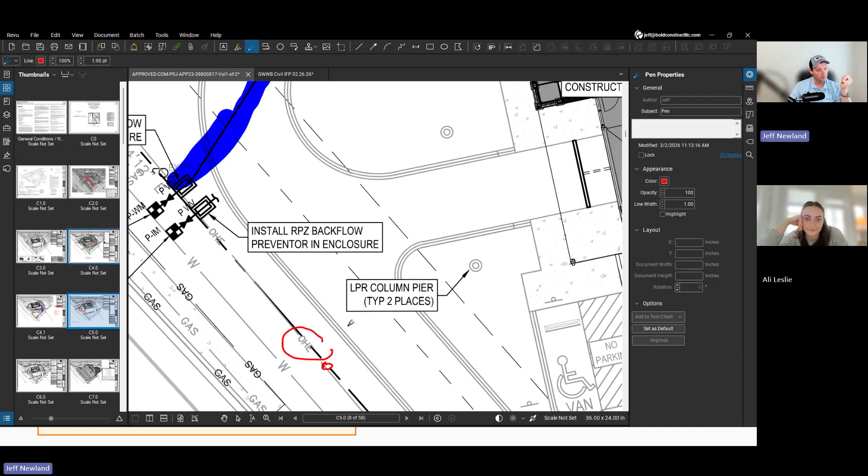And then we got a transformer set right here. Sometimes if he sees that there's power out here, maybe he would have routed this. See, this down here is an OHE. That's overhead electric. So we know there's a power line out here somewhere, right? That's actually where this pole is getting its power from, right here. So for this site, yeah, that made total sense.

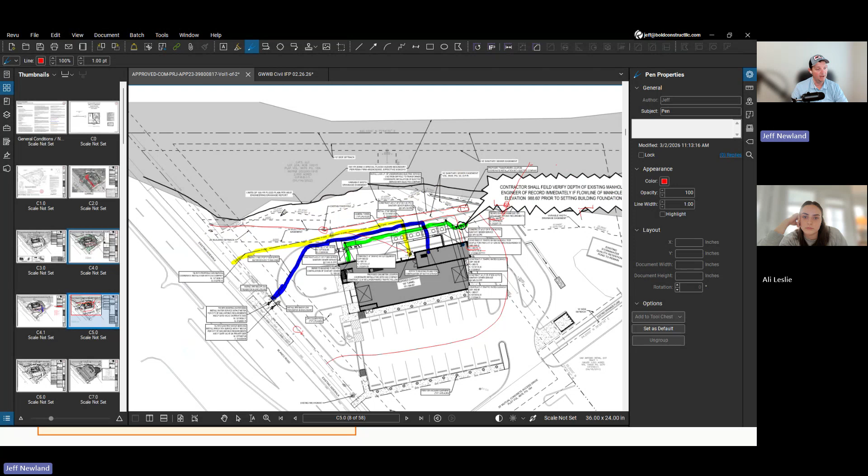If it was different, you'll need to pay attention to where they're running that electrical, because it could be coming from way out here all the way over here. It could be coming here. And again, that's another utility crossing. I don't ever like to cross my water and my electrical for obvious reasons. One's always deeper than the other. It becomes a pain if you happen to get a hole in the conduit, or a pinhole, whatever. It just avoids the problems, right? If we're able to do that, but always pay attention to where your electrical is.

Now, what we did on Smitty's was we eliminated this transformer here, and instead of having it on a pad mount, so let's go to it real quick. I do want to explain this. So this is the pad mount transformer right there. So that is what is being shown right here. Anytime you see that, you know that is a pad mount transformer. Now, the difference is, this is always fed from a pole.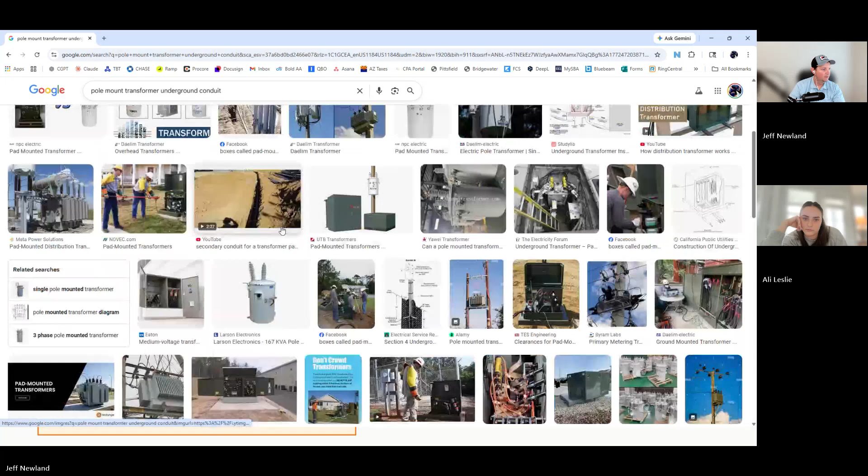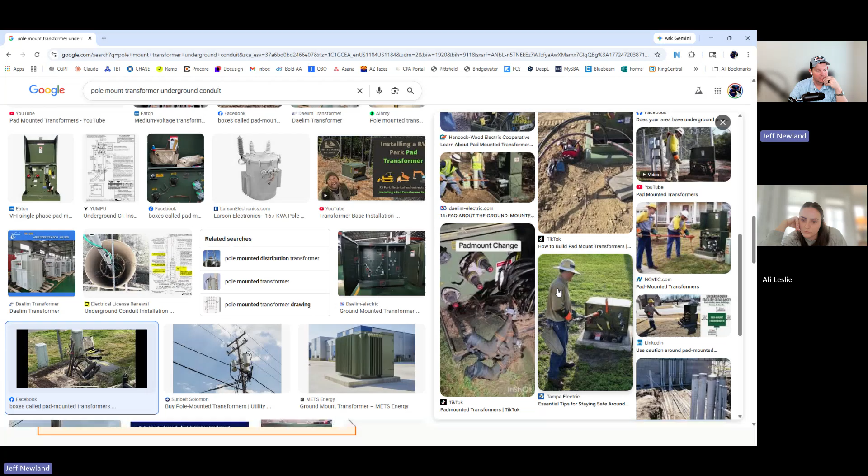I'm sure we'll probably get into this when we talk about electrical later on. But this is pulling from here, right? There's a pole out there. It's got a transformer on it. The conduit is run from underground. Let me see, I know we've got thousands of pictures of them somewhere. Well, that's where they're trenching the one. It's not a very good depiction. Okay, that's a better one. You've seen stuff like that before. So that's running from something outside, going up the wall of the building to another part of the building. So think about that in the same way with the transformer.

So on the transformer pad, that's what UGE is. That's your underground electric. So you're running underground from here to here. And then you would run more underground, and the P stands for primary. So primary underground electric. Think about it the same as an easement, or public versus private land. Primary electric is all part of the electrical provider. So this is EverSource in this situation. We do install the conduit for them, but they pull the lines, they set the transformer, they do all that.

Now, from here to the building, you would have the secondary underground electrical. That would go from your transformer and stub up inside the building. So that would be what you're seeing on that one. Let's pretend that was coming from a transformer. That's what you would see inside the building. So this would be your secondary. Secondary just means our electrician will pull the wire and not the utility provider. Now, that's scenario number one. That's the most popular scenario everybody draws.

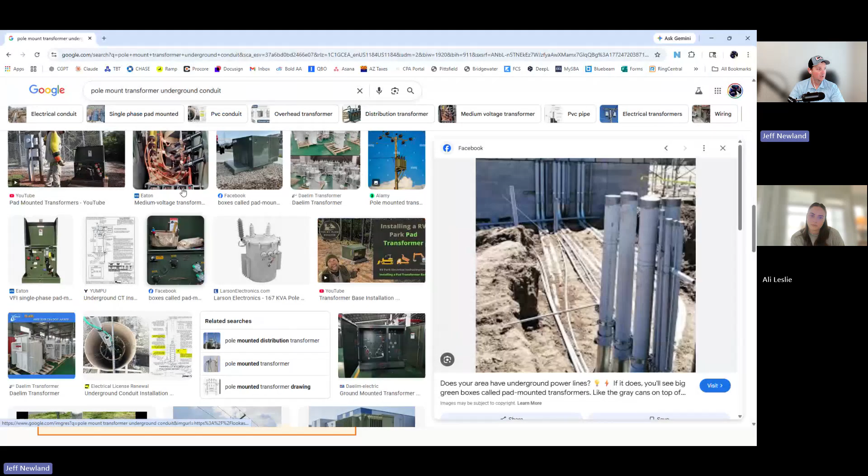Scenario number two is that you eliminate this transformer here. And instead of having just one pole mounted transformer, you might have 3 or 4. Let's say that this is the same thing as the pad mount, except it's in the air on a pole. So then our conduits will go from the pole to a meter that's on the building. And that is your secondary at that point. I'm sorry, I misspoke. That is still your primary because it goes to the meter. Everything coming from the power supplier to the meter is all them. They're responsible for the meter, the lines, the whole 9 yards. Everything after the meter, we're responsible for.

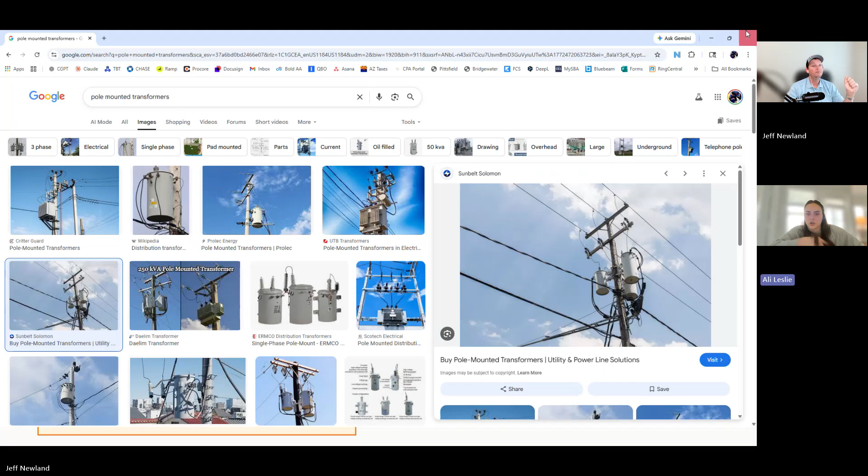So Patrick and his guys aren't going to get up and mess with that pole. Correct. The utility provider is going to handle that. And then once they're done, they're going to come in and do the rest for the building. Exactly. They will never, ever, ever touch a pole. Huge liability. So nobody will ever touch that. All right. So that talks a little bit about the utility crossings. Some sites are super simple. Some sites are very complicated. Just kind of depends on what we're doing. Let's see here.

All right. Observe compaction and proof roll, documents pass, fail. Okay. Yeah, that's good. I think we're good there. Let's see. So compaction requirements. So yeah, let's buzz through this. This might be good to kind of find any holes that we've got.

So if you wanted to find your compaction requirements and how often you need to be testing, where would you look for that? I'll be honest with you, I feel like I need to have a civil set to know the page numbers, but the grading plan. So it's not going to be on your grading plan. This one would be in your geotech. Oh, okay. It might be on your civils, but most of the time the civils will refer to geotech. It'll have a note on there that says refer to geotech report.

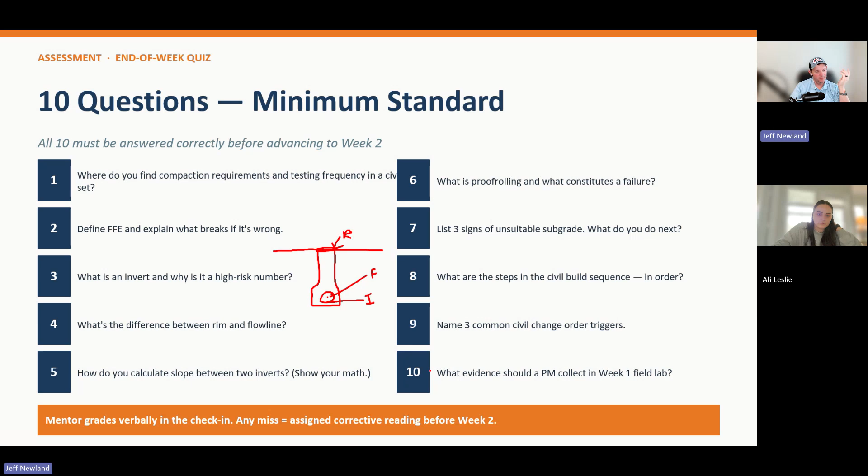Let's see. How do you calculate slope between two inverts? We've already talked about that. You can Google that, it's just math problems. Proof rolling. Remember why proof rolling is important? Yes, because you need to see the compaction of the dirt, and if there's too much moisture, it's not good dirt, and if you need to bring anything else in. Yes.

I'm sorry, I feel like I'm being tested, and I'm nervous. I'm going to put you on the spot. No, that's fair. That's good. I'll be honest, because I'm not taking my notes, I should have gotten FFE right.

Unsuitable subgrade. So is the proof roll done before or after your compaction tests? Well, you do your proof roll before the compaction test, but sometimes you have to do the, I'm gonna say undercut, but I don't think undercut's the right term. Yeah, if you do a proof roll, we make the first determination, but it's confirmed by the testing lab or the geotech engineer, whoever. And sometimes that's the same company.

So you'll do your proof roll, and then if it's determined that you have to take soil out, that's where your undercut comes in. You'll do an undercut of that area and then build it back up in your compactions and your lifts at that point.

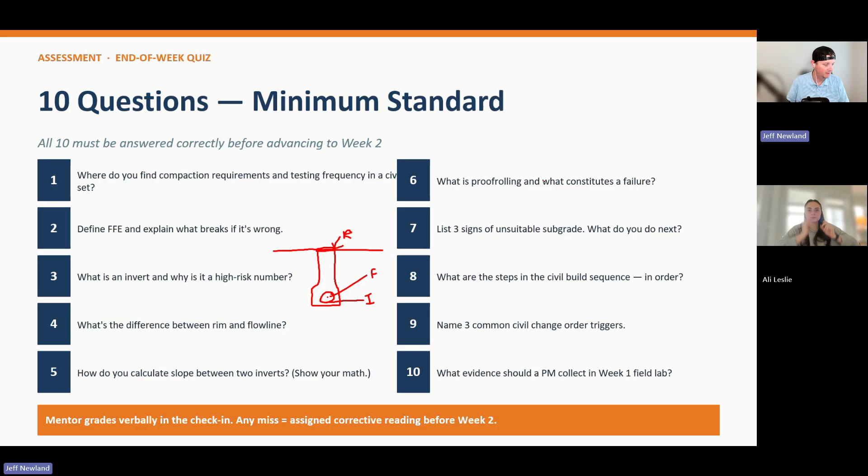What evidence should a PM collect in week one field lab? Oh, that's when you're out in the field. So we won't worry about that. Oh my gosh. I was going just based off of the videos I watched yesterday, but now I know. Now I'm prepared. Let's see. Oh, these were the video references.

A good PM leaves today able to navigate, explain. You will. Stationing doesn't matter. Watch, you'll get on a big project someday that I'm not involved with, and you'll be like, God damn, I knew I needed to know what stationing was. I have never used it in 20 years. So, like I said, it's a survey deal.

Build and walk a 7-step civil sequence. I think you'll get to that, and next time we'll get more in depth, and that's where we might combine a couple of lessons, because we can really get in on the things I want you to know how to do: read a geotech report. That's number one. And maybe be able to look at a set of civil plans and not feel like you're completely lost.

When I started, I didn't look at my first civil plans until I was probably 5 or 6 years into construction because we never built anything ground up. It was all remodels. So it was a completely new world for me, and it was completely confusing. I still don't understand every bit of it, but I didn't understand it all or close to it until I actually got out into the field. But I didn't have YouTube. We didn't have any kind of training. We didn't have anything. So that probably would have helped me a little bit.

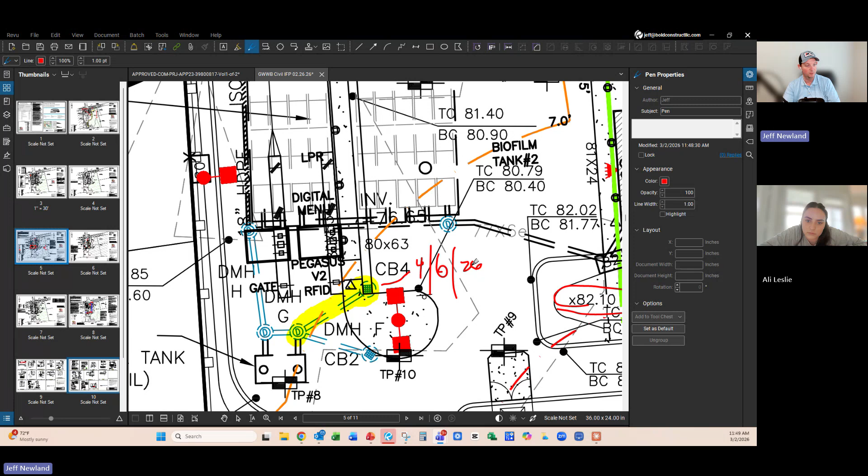How about now? Yes. Okay, so what I've done is, like I said, I would physically do this on a set of plans. I would highlight, so say we installed this in one day, we set that catch basin, we set that manhole, then I would come out beside it and I would actually write in red pen 4/6/26. And then let's say the next day, maybe we did this and maybe we did this. Then I would do the very same thing.

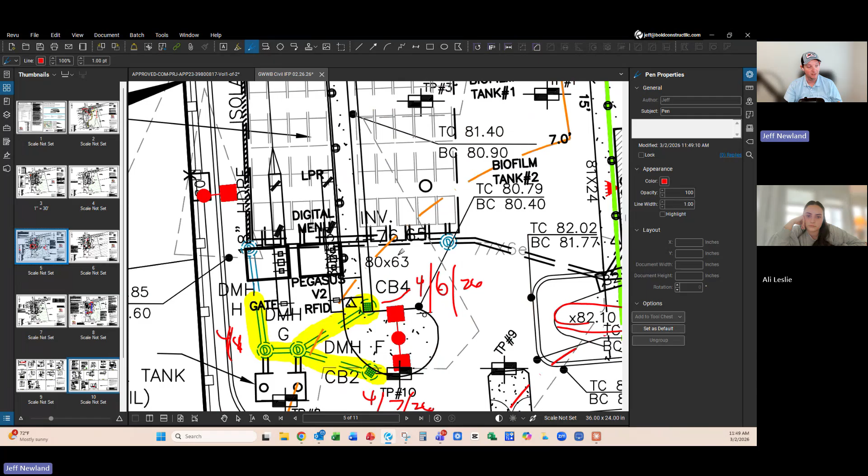And I would write, well, we did that the next day, so that was 4/7/26. And then maybe this was 4/8/26. That way, one, it creates an as-built drawing. And two, anybody that comes into the job trailer, or more importantly, as we run through the job, maybe something happens somewhere, and I say, okay, I need to look at my daily report for when we did that. At least that gives me a reference that I could go back six months after the fact and be able to look that up.

So I would certainly recommend going through and highlighting, and it helps you too when you highlight because it really calls out the stuff that's not highlighted. And the other thing that's difficult to read on a computer is, as you're going through here, like this site legend here. So this is all the crap that we have to install. And it's just called out by letters, well, on this page it's all letters. So every one of these you'd have to go through and say, okay, what exactly are we talking about here with D? It looks like it's just pointing out here in the middle of nowhere.

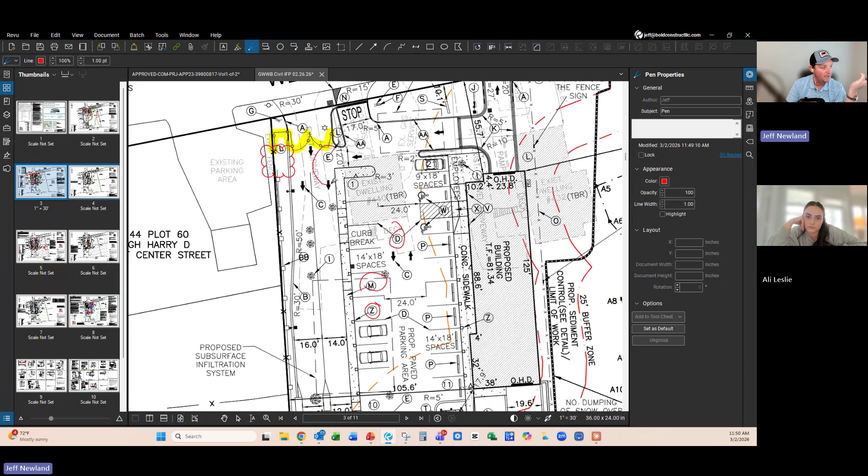And we look and we say, oh, all he's talking about is the striping. Okay, that's fine. That makes sense. Well, what about E? What is this right here? And you go over and you say, oh, okay, that's a do not enter sign. So that's going to help when you buy out the striping for a job, you'll be able to go through and look, and most of the time your civil is going to be done similar to this, just because it's very difficult for them to call out all this stuff.

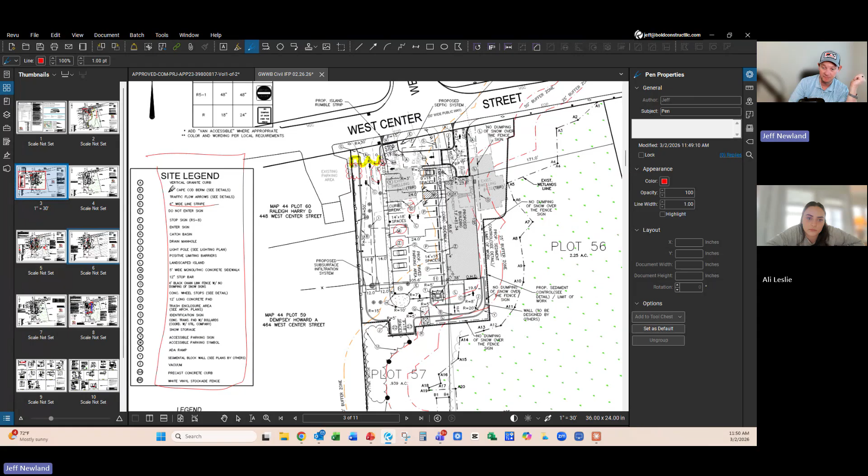But that way, this gives you a list of, okay, somebody has to be responsible for installing all this stuff. Yes. And maybe the striping guy has all your striping, right? So he's got that one, he's got that one. Let's say he's doing the signs too, so he's doing these signs. Oh, catch basin. Well, shoot, that's my earthwork guy, so that's a different guy. Manhole, that's a different guy. Light pole, that's the electrician. Positive limiting barriers, I'm not even sure what that is.

So I would look here and try to find K, but that's kind of how I would go through a hard set of plans and start looking at it, right? Yeah. And at least start familiarizing myself. Not that I want to memorize it, but you'd be amazed that when you start looking at scopes, you're like, I remember something, there's something I need to include. And it'll take you back to your notes and you're like, okay, that's right, he needs to pick up. Doesn't look like he got this sign that's in the very back of the site, or something like that.

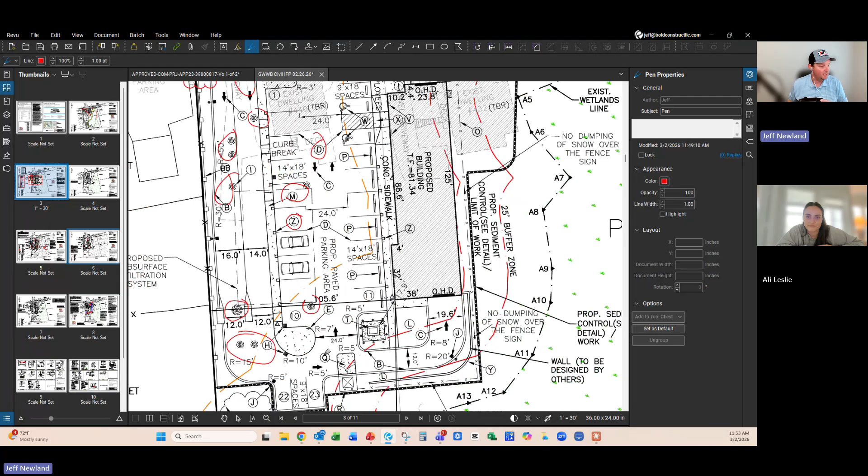So I think having a printed set, because then whenever I go, I can bring it and make my personal notes on mine. So anyways. No, yeah, absolutely. And it's also going to be super helpful, especially on this site, because we have so many manholes. I mean, all of these are manholes. Every one of these. We don't ever have that many. But anyway, no, that's perfect. You're thinking about it exactly the right way.

So, cool. All right. Well, I think that was a great first lesson. What do you think? Yeah, I think so too. I will be honest. I think I'm more prepared on what to expect, because when I was watching the videos, I was like, oh, this is easy, these videos will just go over our notes. But I mean, it was tough. Like the questions are tough, but it's just because it's all new.

Right. But I do think it is helpful that even though my experience is little, I have some experience of seeing projects, car washes only, but from the beginning of civil to the end. Yeah, and the car wash experience will serve you well because it is fairly heavy on the civil. There's a lot of projects where you don't have these big old reclaim tanks that have to be piped in, or you don't have a storm system that's completely underground. Everything's just maybe run to the city from one catch basin.

Super simple. Something else that might help you with the civils too is the Brownwood project. Oh yeah. That one was very extensive and he had to do a lot of work with TxDOT and everybody else, but reviewing that as well would give you a different look, because that's more of a development, right? We're not just developing one site, but we're developing two and prepping for a third. So that can be beneficial as well. I actually just threw those plans away a few months ago because I had them at the home office, and when I moved out, I was like, oh, I don't need these anymore. But yeah, that one, I remember that was a lot.